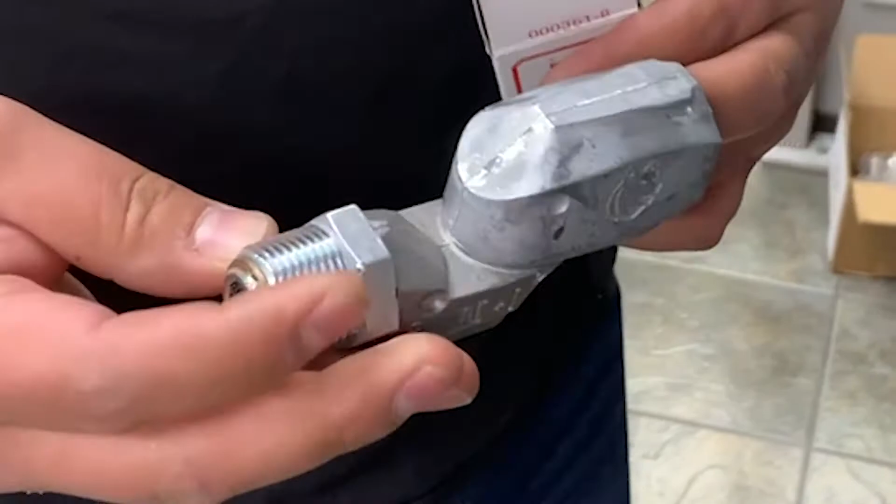This is a technical bulletin about Husky Corporation's 3/4 inch multiplane swivel, the 350. Having a swivel included in fueling equipment is important. It helps the nozzle sit in a vehicle in the correct position, it helps prevent hose kinks and twists, and prolongs the life of the hose. It's common sense that you'd want equipment that swivels as easily as possible.

Husky wanted to find out how we stacked up against the competition, so we took our 3/4 inch multiplane swivel and put it to the test to see how easily the joints swiveled. Husky's Model 350 swivel has precision machined journal bearings, fluorocarbon and fluorosilicone O-ring seals, and uses E-clips for safe and dependable retention in the nut and mid joint.

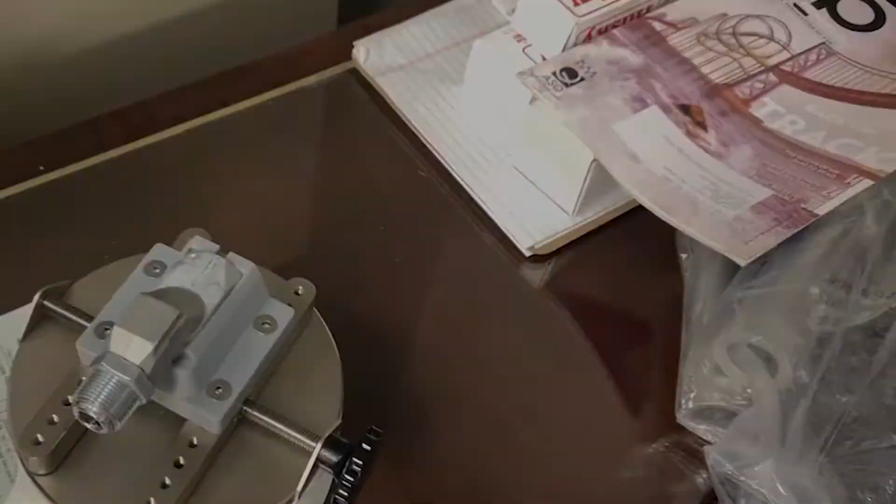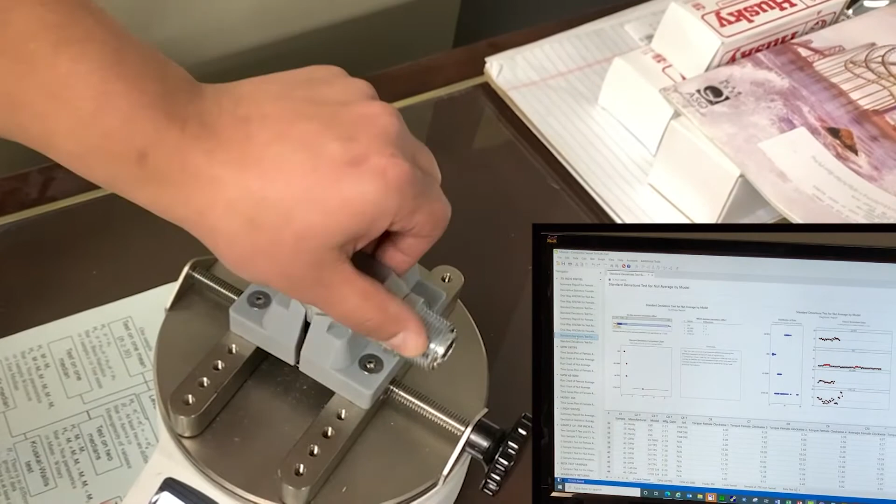To test how much force it takes to swivel the joints, the swivels were mounted on a torque table and the rotational axes of the table and the swivel joint were aligned. A 3D printed fixture helped make sure the mid joints were in the correct position. The full range of travel was tested in 90-degree increments, clockwise and counterclockwise. The average torque was calculated and plotted for each of the sample's nut and mid joints.

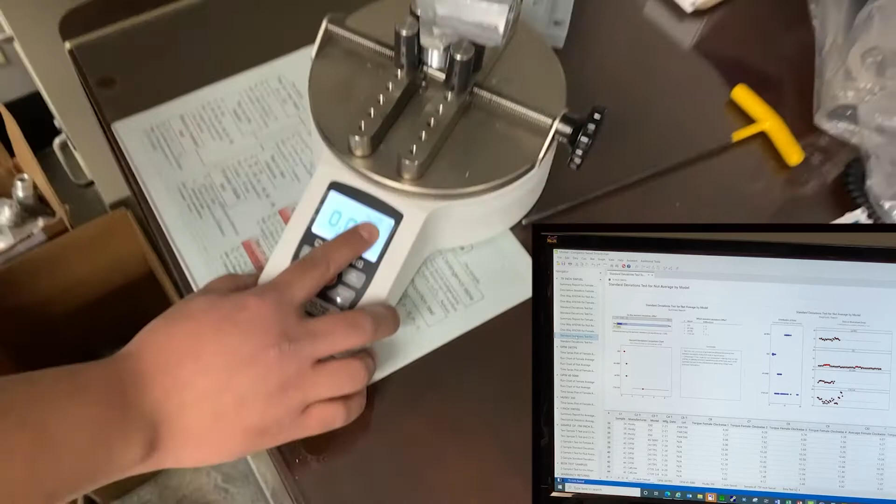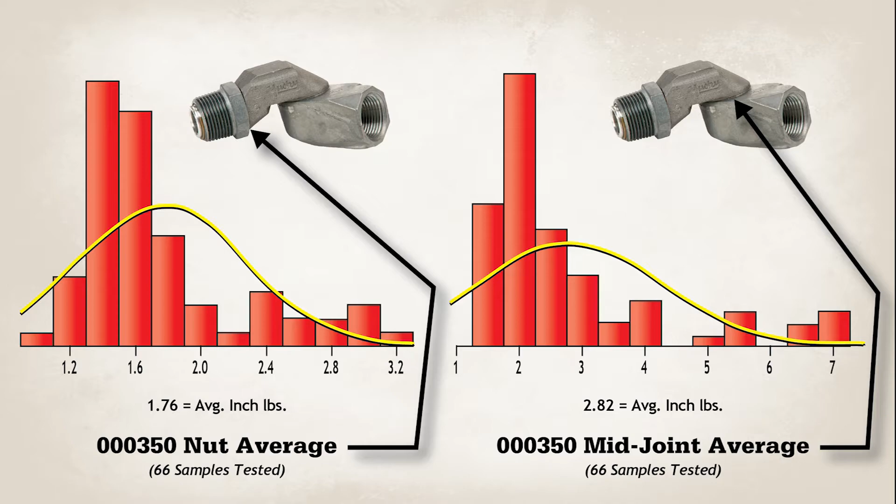So the Husky swivel on average took about 1.76 inch-pounds to swivel the nut joint and 2.82 inch-pounds to swivel the mid joint. Over all the samples that we tested, the nut torque varied within a range of 2.07 inch-pounds and the mid joint varied within a range of 5.53 inch-pounds.

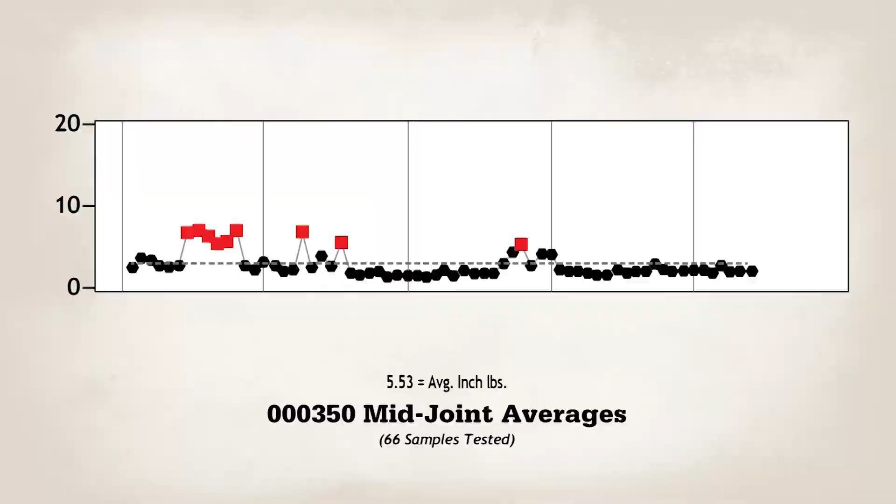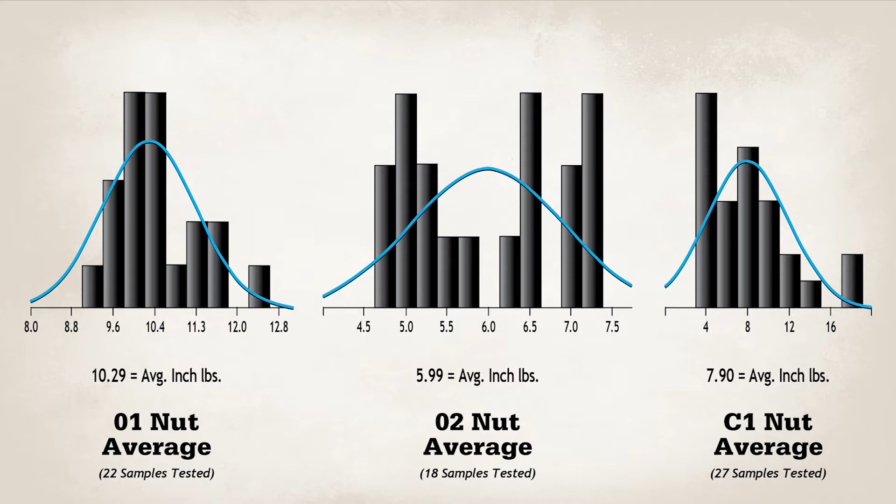Here are the results of the three competitors that we tested. They took 10.29 inch-pounds, 5.99 inch-pounds, and 7.9 inch-pounds to swivel the nut joint. It took 10.68 inch-pounds, 6.18 inch-pounds, and 6.95 inch-pounds to swivel the mid joints.

The competitors' nut joint torques varied within a range of 3.9, 2.5, and 14.9 inch-pounds. And the mid-joint torques of the competitors varied within a range of 8.09, 3.16, and an astounding 16.3 inch-pounds.

So what does all that mean? As we mentioned earlier, the low swiveling force helps the nozzle sit in the vehicle correctly, prevents kinks and twists in the hose, and prolongs the life of the hose. According to our tests, the 350 swivel is going to do the best job at that.

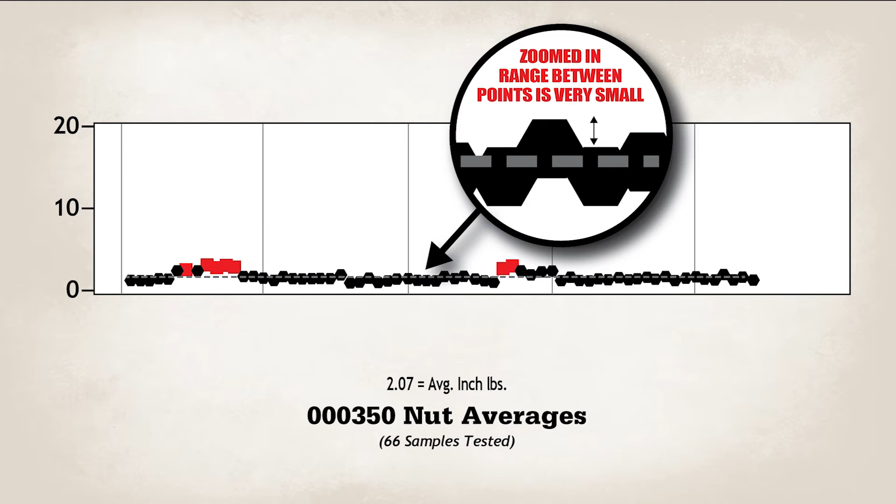The smaller the variation in the torque data, the more control the manufacturer has over the manufacturing processes that go into making that swivel. Over all of the samples, Husky's rotational force varied by 2.07 inch-pounds. That's an extremely consistent performance from part to part. The competitor varied by 14.9 inch-pounds. So we're interpreting that data as an indication that the manufacturer has a hard time making the same thing twice, or maybe they're choosing to make a less consistent product to save money.

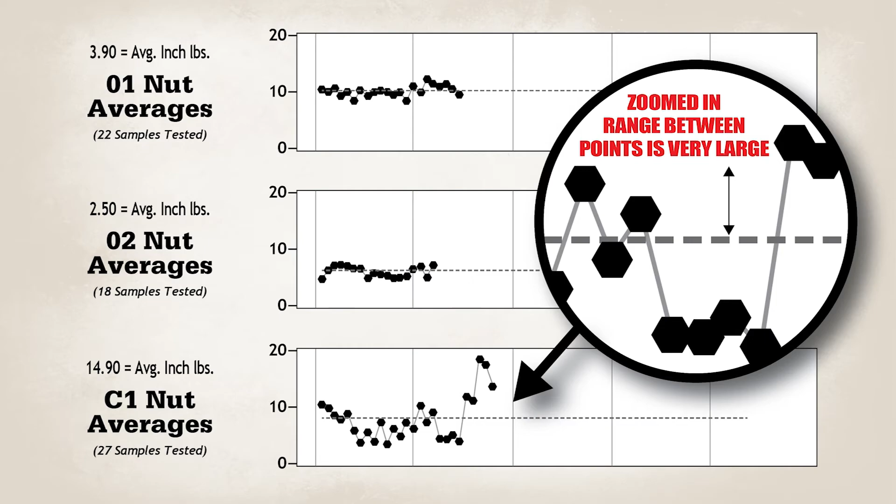So how does Husky keep that variation so small? Here's an example. A particular dimension on the journal is machined within a 0.003 of an inch tolerance range. A piece of printer paper is 0.004 of an inch thick, so that means that the dimension on the 350 swivel is allowed to vary less than the thickness of a piece of paper. If we find a part that's outside of that tolerance range, it's rejected. We don't use it.

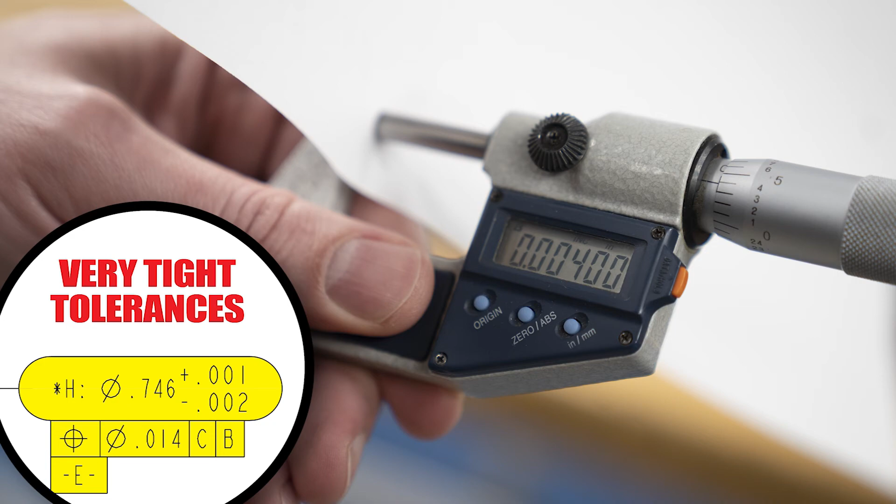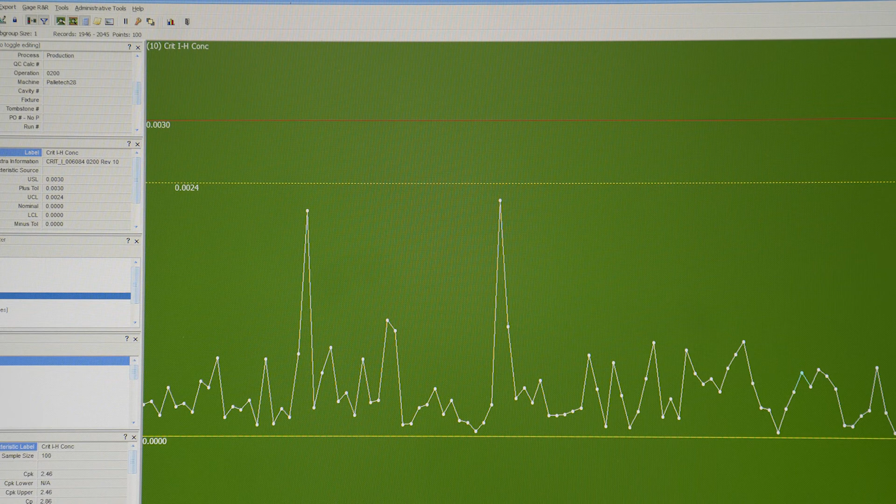We work hard to control our machining processes. We track them over time and look for trends. Just on Husky's 3/4 inch multiplane swivel, we track over 62 dimensions. That's how we produce the easiest swiveling, most consistent, highest quality fuel swivels on the market.